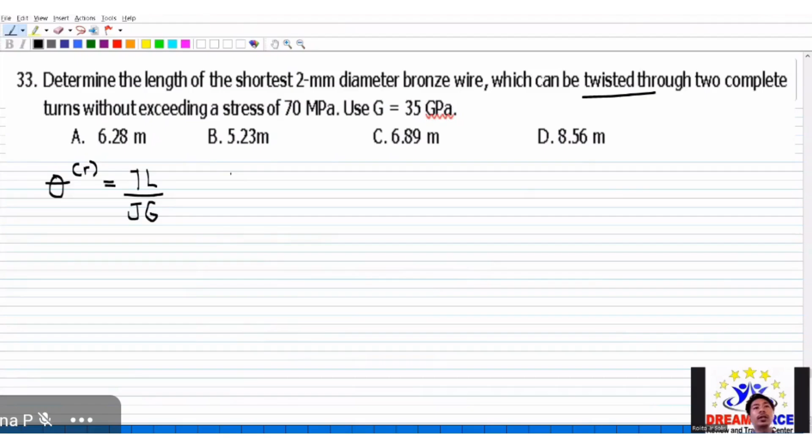2 complete turns, what does that mean? 2 revolutions, right? And we have a conversion of radian into revolution or revolution into radian.

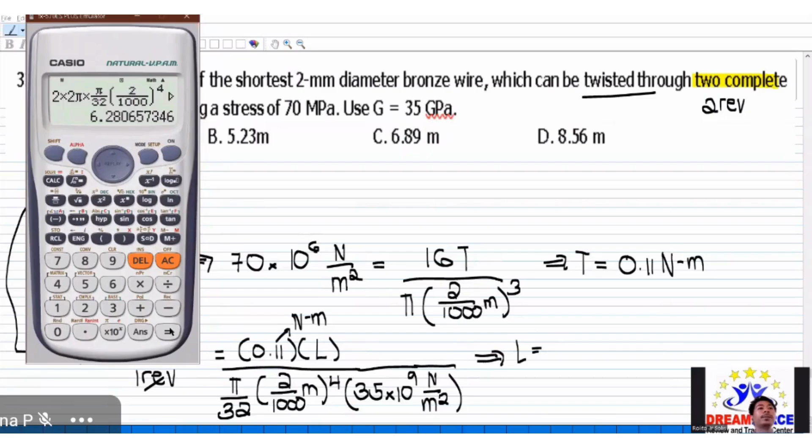So the answer there is 6.28 meters, that is letter A.

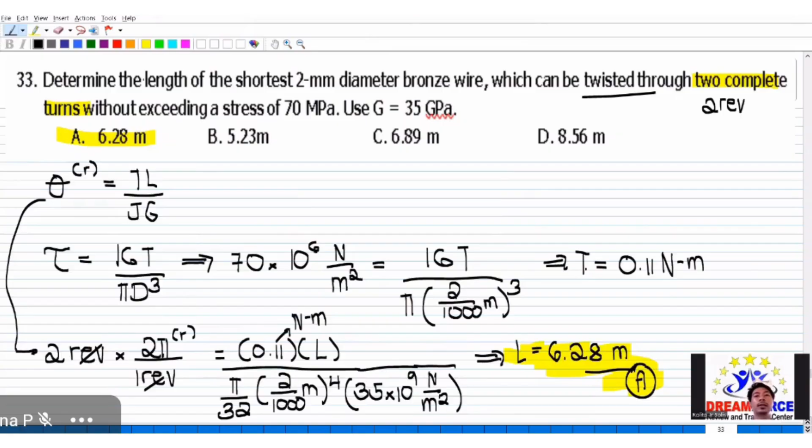Let's go back to number 22. Hollow steel shaft, 2540 mm long, must transmit a torque of 34 kN meter.

The total angle of twist must not exceed 3 degrees. The maximum shearing stress must not exceed 110 megapascal. Find the inside and outside diameter of the shaft that meets these conditions.

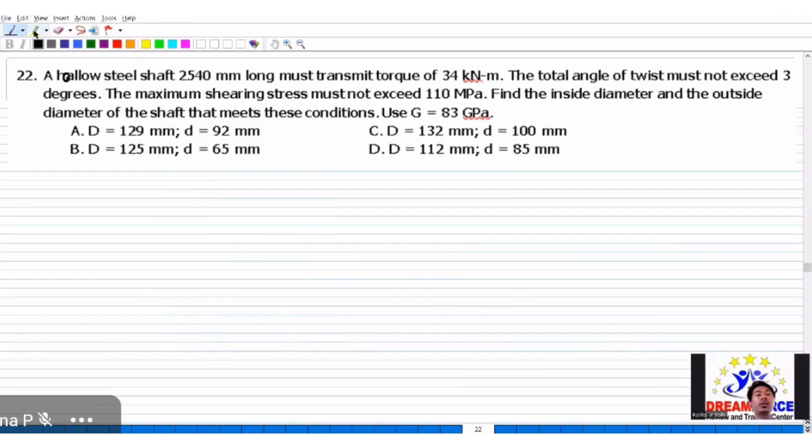What can we use? I can use the torsional stress formula, right? This is 16 T d0...

Okay, so divided by pi times the outside raised to 4 minus the inside raised to 4.

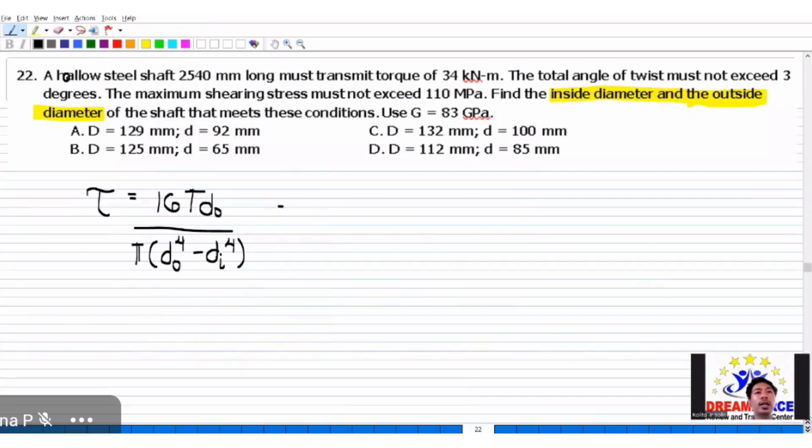Okay? So, shear stress, that is torsional. Okay, 110 megapascal or 110 Newton per square millimeter.

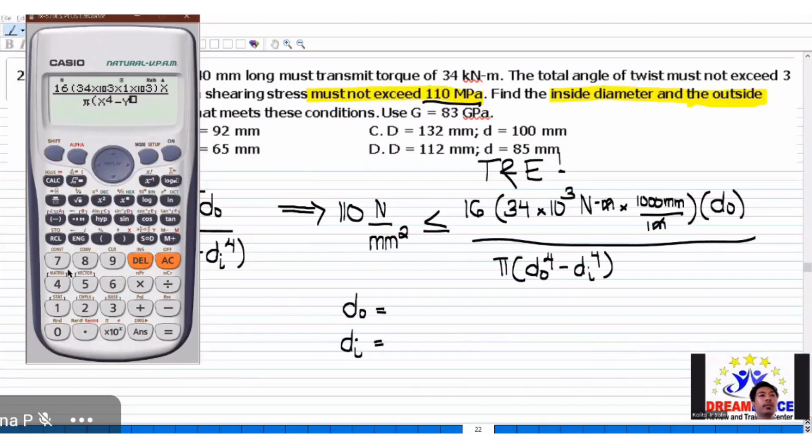Okay, let's say yung outside ko, trial and error to. Okay, so yan. Outside is x, let's say. And then, so pi times x raised to 4, minus inside raised to 4. Okay, hindi na natin gagamitin yung angle, no? So let's do trial and error, calc. So again, ang goal natin dito dapat less than or equal to 110. Yung pinakamalapit. 129 for x, 92 for y. Okay, ito possible, no? Makukuha mo dito 108.81.

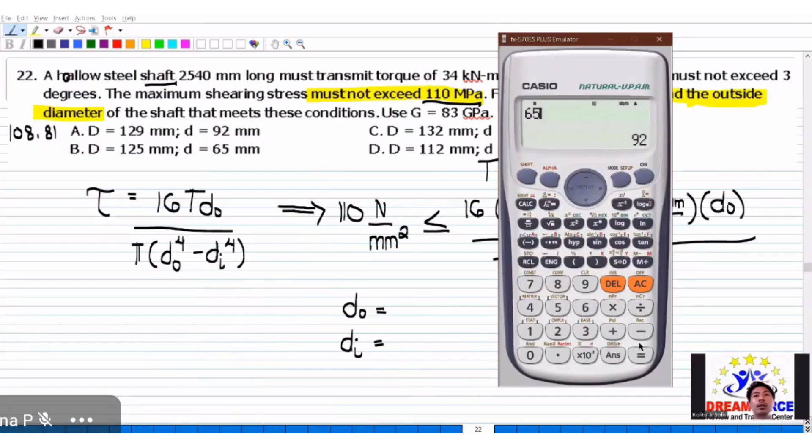Possible. Okay, syempre, trial and error, itry mo lahat. 95. So ito, napakalayo na po. So we can safely eliminate letter B. Okay, how about letter C? So 132, then 100. Okay, ito malapit din pero sumobra. So sabi niya kasi not to exceed, no? Okay, kaya hindi yan pwede. Lastly, letter D.

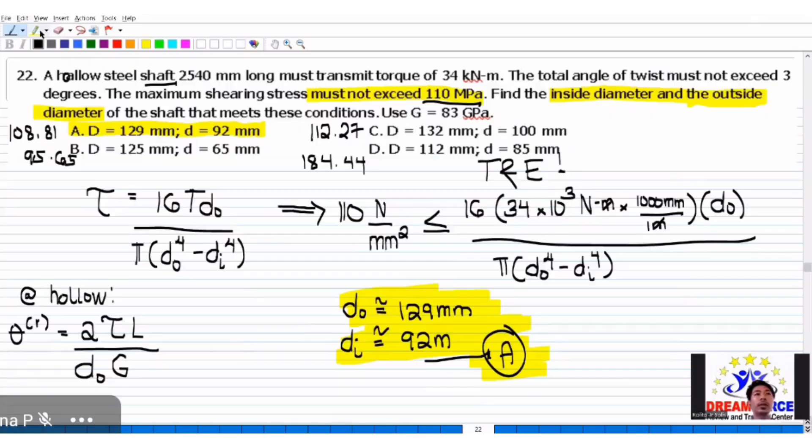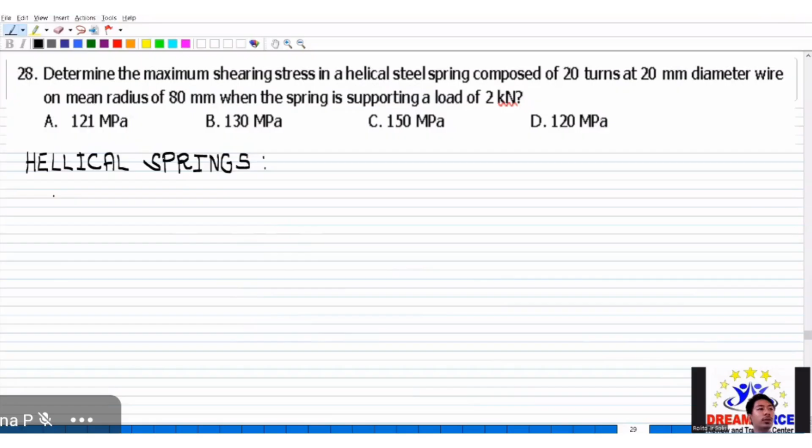Okay? Ganun din sa mga equipments din, di ba? Sa mga power tools, sa mga cranes and so on. Kaya napaka-importante. Okay, meron po tayong formula. So, pag ang hinahanap ay maximum stress, that is equivalent to 16 times the load times the mean radius, divided by pi d cube, diameter of the spring. Multiplied by 4m minus 1 divided by 4m minus 4, plus 0.615 divided by m.

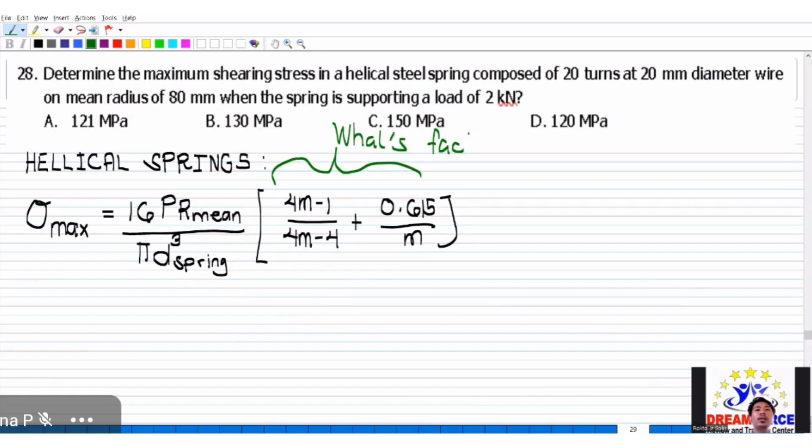Okay, engineers, pag ang hinahanap sa problem ay hindi maximum, alisin nyo lang ito. Kunwari, determine the shearing stress, ito lang po yung formula mo. Pero pag maximum stress, isama mo to. Ang tawag po dito ay Wahl's factor. In case ibigay sa problem, what is the Wahl's factor of the given spring? Ito po yan, that quantity. Wherein yung m po natin dito, that is the ratio of the mean diameter divided by the spring diameter.

Okay, kunin natin si m. Mean radius ay 80 mm, so therefore our mean diameter is times 2, divided by 20 mm. Ito ay 8. So substitute na po natin. Maximum stress: karamihan ng given naka-millimeters, kaya magbabase na lang po ako sa millimeters, engineers. So 16 multiplied by P, yung P ay load, 2 times 10 raised to 3 Newton, times the mean radius, 80 millimeters.

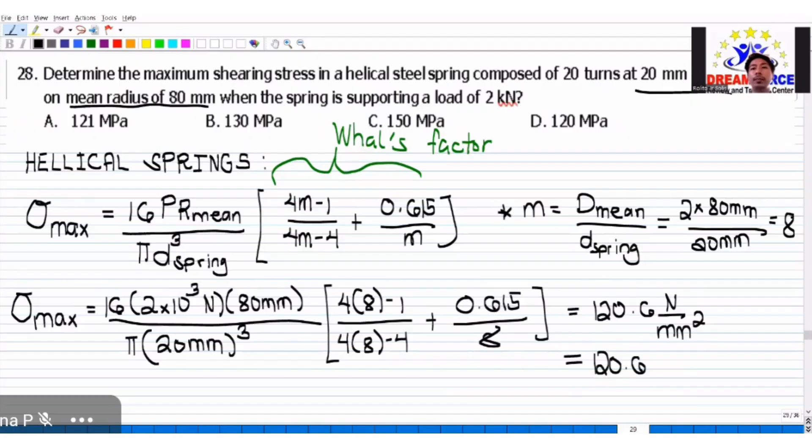Over pi times diameter, 20 millimeters raised to 3. Multiplied by 4 times 8 minus 1 over 4 times 8 minus 4, plus 0.615 over 8. Paki-solve na lang po yan. Yung value na makukuha natin ay 120.6 Newton per square millimeter, which is also megapascals. So sagot, pinakamalapit, may 121 dyan, yan ang pipiliin natin. Kung wala yung 121, yung 120. So letter A.

Direct substitution po ulit. Isama nyo na lang din yung elongation ng spring, meron po yun sa formula book nyo. Kindly take note of that. Marami lang formula, but mas gusto natin yung direct substitution, basta alam natin yung formula. Okay, that is 28.

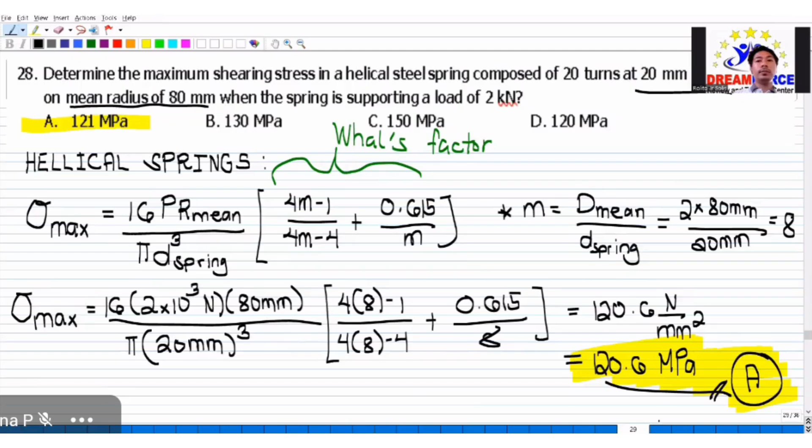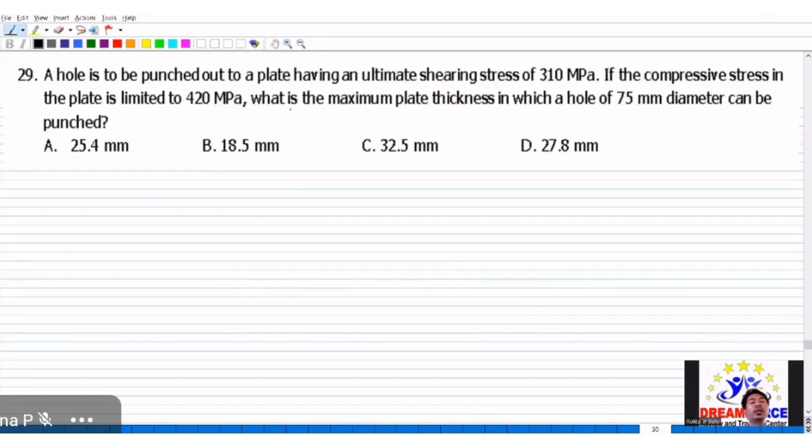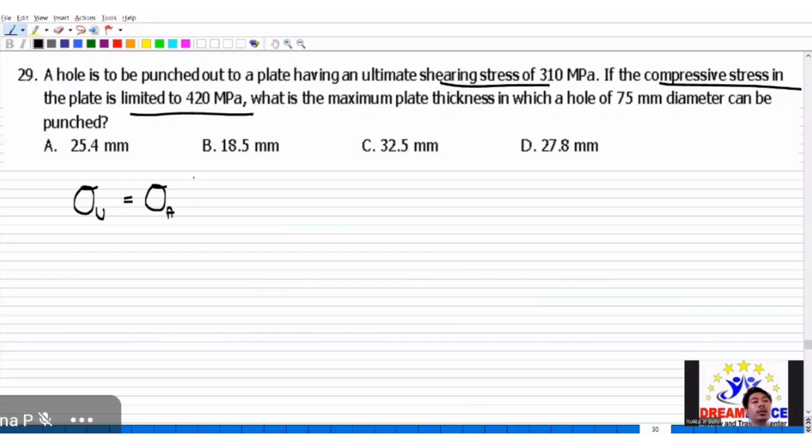Number 29. A hole is to be punched in a plate having an ultimate shearing stress of 310 MPa. If the compressive stress in the plate is limited to 420 megapascal, what is the maximum plate thickness in which a hole of 75 mm diameter can be punched? Pinagsama yung compressive stress at shearing stress. Meron po tayong formula na madederive, related sa thin-walled pressurized vessel: the ultimate stress is equivalent to the axial stress multiplied by the diameter divided by 4t.

Ultimate or yield stress, ito naman yung allowable stress, or pwede rin shear. Ito naman yung axial stress, yung mga compressive or tensile stress. Direct substitution na po yan. The ultimate stress ay 310 MPa.

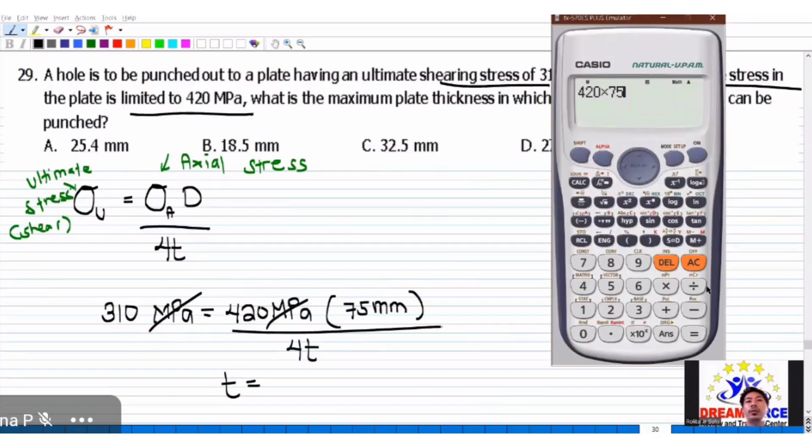Multiplied by the diameter, 75 millimeters, over 4 times thickness. Cancel. 420 times 75 over 4 over 310. Answer there would be 25.4 millimeters. From the choices, that is our letter A.

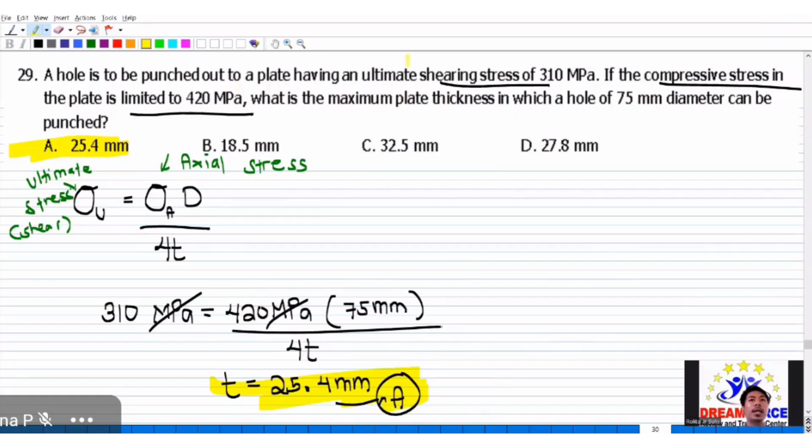Okay, so yan po. Yan, sama na lang ito sa formula. Pag pinaghalo yung, usually yung problem lang na yan. Okay, pag pinaghalo yung shearing stress tsaka yung compressive doon sa plate. And so for that problem alone, okay, use that formula.

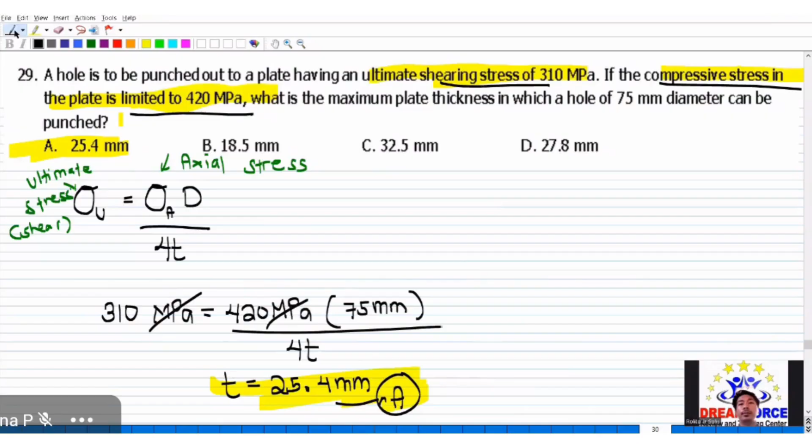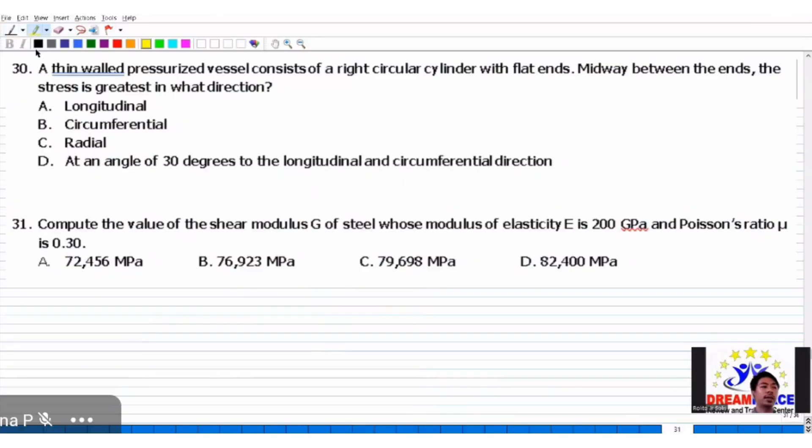Okay, sige. So doon tayo sa last 4 numbers. Yung isa objective. Okay, a thin-walled pressurized vessel consists of a right circular cylinder with flat ends. Midway between the ends, the stress is greatest in letter B, circumferential. Okay, so mas mataas si circumferential, no? Circumferential stress ay 2 times ng longitudinal stress.

Okay, 31. So compute the value of the shear modulus G of steel whose modulus of elasticity E is 200 gigapascal and Poisson's ratio mu is 0.30. So meron tayong mga series syempre of testing sa mga materials natin. Isa sa mga nakukuha natin ay itong ratio na to. Okay? Ayan, so pakibasa si engineering materials. Okay, so meron tayong formula. So G is equivalent to E divided by 2 times 1 plus mu. Okay, ito yung shear modulus, ito yung modulus of elasticity, and then ito yung Poisson's ratio.

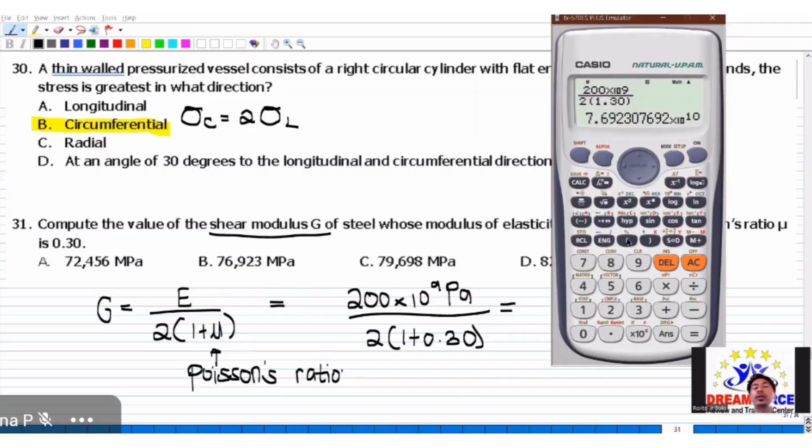Okay, so ginagamit po yan on testings. Okay, direct substitution. So kunin lang natin si G, shear modulus. Okay, we have 200 gigapascal. So 200 times 10 raised to 9 pascals divided by 2 times 1 plus 0.30. Okay, again, so simpleng substitution. Okay, alamin mo lang yung formula. Over 2 times 1.3. Okay, answer there. So in megapascal, 76,923. Okay, 0.08. Okay, megapascals. So answer is letter B.

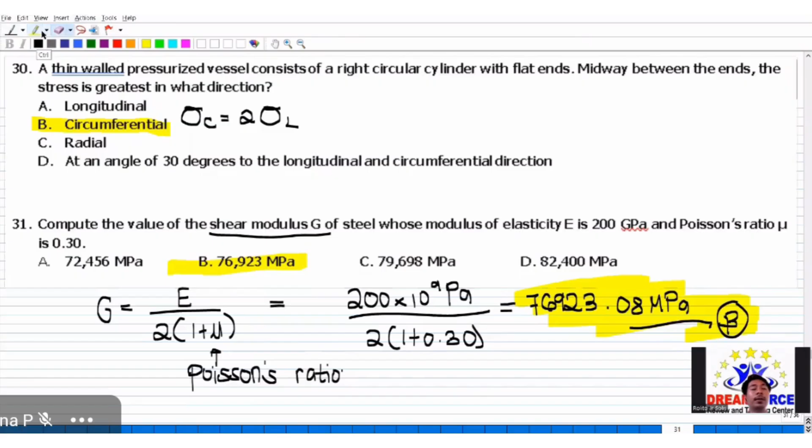Okay, so wag niyo na pong pag-aralan yung sobrang komplikado, yung subject ng civil. Wag na po. So far, wala namang binibigay po na ganun. Okay, kasi pang ano lang po talaga to, no? So yung major talaga to ng civil. Okay? So, yan. Kaya yung mga basics lang yung pag-aaralan natin kasi hindi na natin kaya, no, pag yung sobrang hirap. Okay? So, pero syempre, kailangan memorize pa rin natin yung mga formula. So, kailangan pa rin natin ng conversions, ng constants. Ayan. So, that is 31.

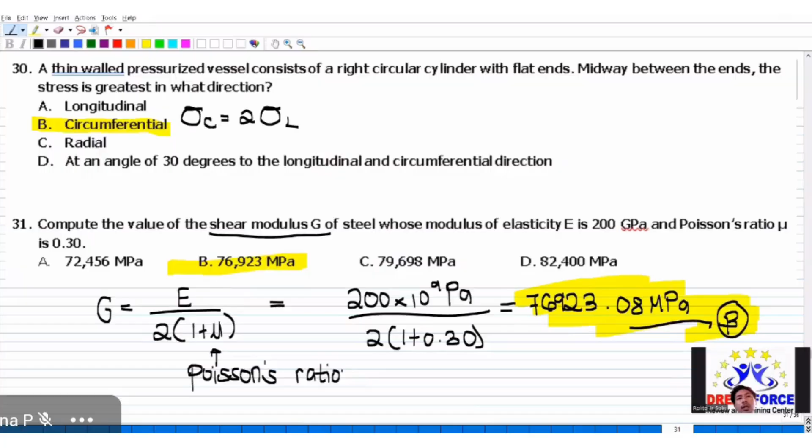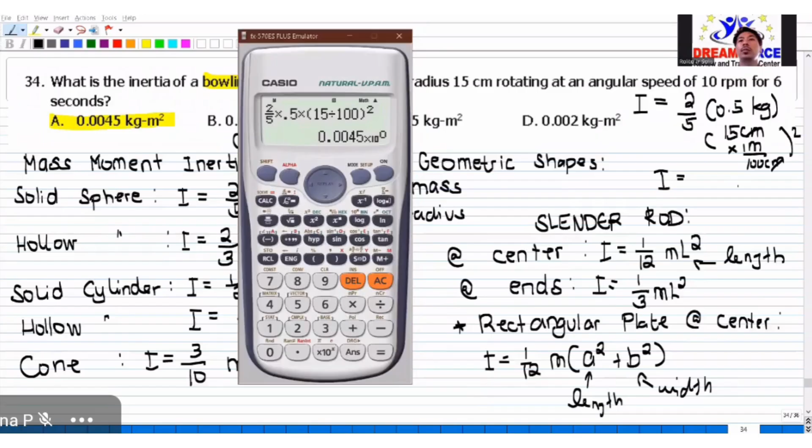Okay, bowling ball. So, bowling ball is a solid sphere. Diretso lang yan. So, I is equivalent to, ito, 2 over 5 times mass. Wala nang gamit yung mga ibang given dyan. Times radius. Sila yung radius, 15. Convert mo. So, 15 cm. Okay, convert sa meters. So, 1 meter over 100 cm. Square. Okay, yung I natin dyan, so that is 2 over 5. Okay, multiplied by 0.5 and then times 15 over 100. Squared. Okay, so shift ENG. That is 0.0045. Okay, so kilogram meter square. So mass moment of inertia naman yan.

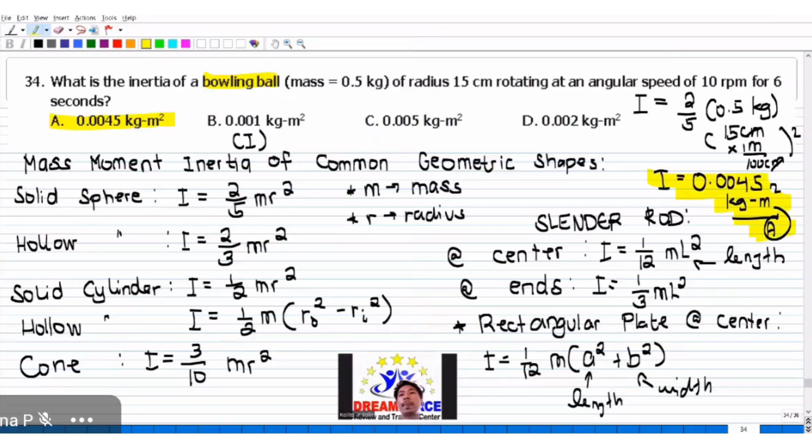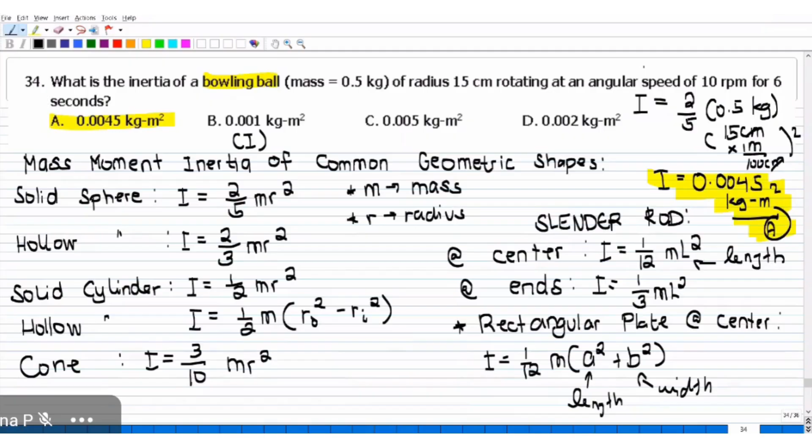Okay, so center of mass pa rin. So yan natin nakukuha. Okay, yung center of mass. And ikot kasi yan. So basta inertia may pag-ikot. And rotating. Diba? Kahit anong inertia, polar moment of inertia, mass moment of inertia. Okay, so yan. May rotation, may inertia. Okay, sige, paki-take note na lang po. Alisin ko lang yung picture ko. Ayan, sige. Mga formula. So yan po ay mga common geometric shapes. Okay? Ayan, so doon po tayo sa last number, 35.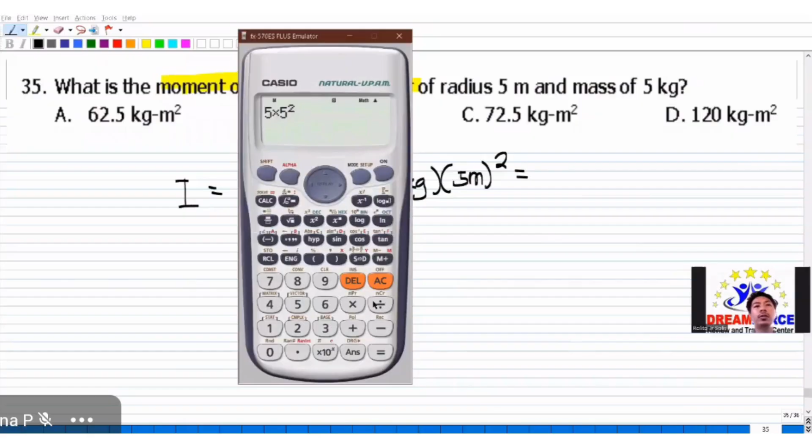Okay, so still, excuse me. Okay, so what is the moment of inertia of a cylinder? Okay, so a radius 5 meters and mass of 5 kilograms. Okay, so again, so moment of inertia, from the unit kilogram meter square, so yung I. Okay, so cylinder, walang sinabing hollow, so therefore that is solid. Okay, 1/2 times the mass, times the radius square. Direct sub, so 1/2 multiplied by 5 kilogram and then multiplied by 5 meters square. So 5 times 5 square over 2. So that would be 62.5 kilogram meter square. Okay, so answer there is letter A.

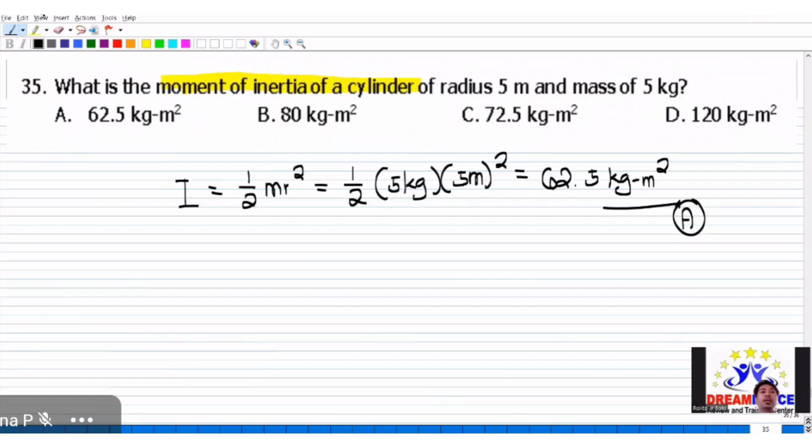Okay, ayan engineers, so that would be the end of our lecture. So I